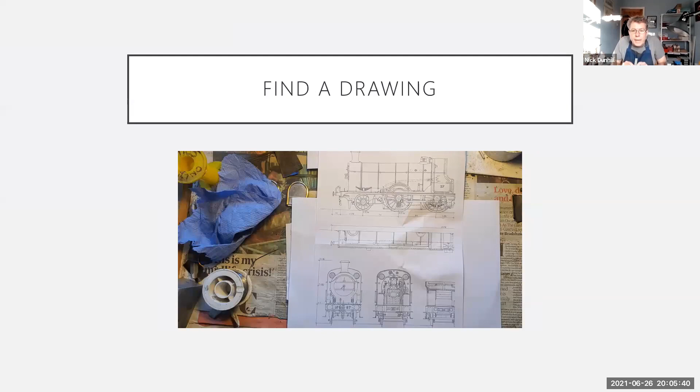Right, well, the first slide there shows the drawing that Simon sent to me by email. One of the first things I always check when I get a drawing through email is the scale on it. Simon sent this claiming that it was a 1:1 7mm scale drawing.

I found a measurement on it and checked it to make sure it was the actual height of something, which was 4 feet, conveniently 28mm. But on the drawing it was only 26mm. So the process of creating a PDF, emailing it, and printing it out reduced the scale of the drawing somewhat. I think that was worth knowing.

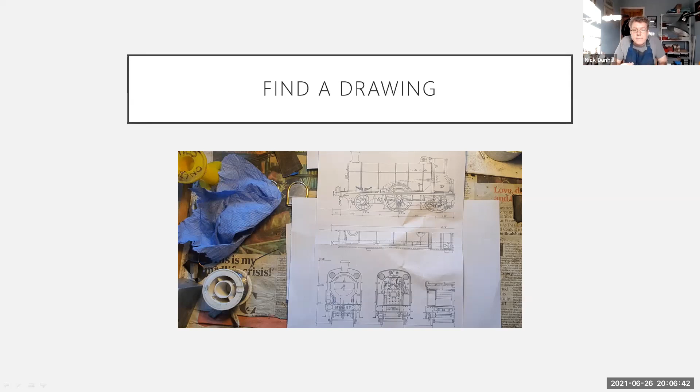If you go to the next slide, you can see what I've done there - some measurements worked out that I need to multiply by a conversion factor of 1.05. So everything I measure off the drawing, you multiply by 1.05, and that gives you the true size in 7mm scale.

You can see on the smokebox front there that I've made some very basic measurements. I always start by making a vertical line perpendicular to the footplate going up through the center of the smokebox, and then take datum points all the way down that line, which allows you to draw it out.

The most important thing is to start with the dead center, usually where the smokebox dart goes in, and in this case there's a nice smokebox dart smack in the middle, so that's where we started. I've taken some horizontal measurements across the drawing at various places above the center line, just to help get the radius right at the bottom - it curves in and then curves back out in quite a pleasing way.

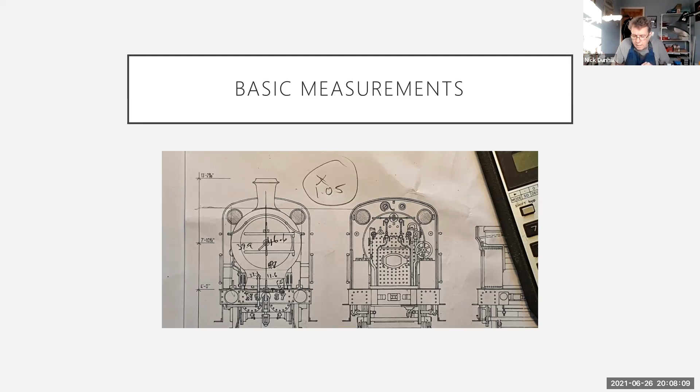If you want to zoom onto the next one - I transposed that into a very basic sketch. But you have to bear in mind when taking these measurements that you have to subtract twice the thickness of the material you're using in some places.

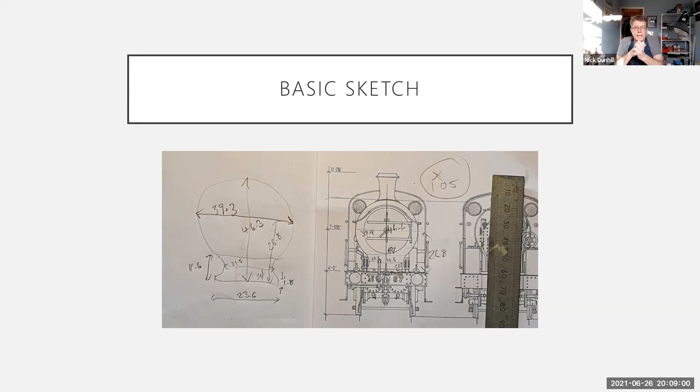Right at the bottom of the firebox and smokebox, it's always a good idea to make sure it will fit between the frames on the engine. There's always some compromises in fine scale modelling - the back-to-backs of the wheels mean you can never get the locomotive chassis to true scale. It always ends up 2 or 3 millimeters narrower than it should be.

What I always like to do is transfer that narrowing to the bit of the footplate that sticks up above the chassis, so it's coincident all the way up, and you don't get a step at the footplate level.

That sometimes means I narrow the bottom of the smokebox so it nestles between the frames. But in this case I got in touch with Simon, and he decided he wanted it to scale above the footplate and would sort out the chassis himself. That made it easier for me, because I just took the true measurements off the drawing.

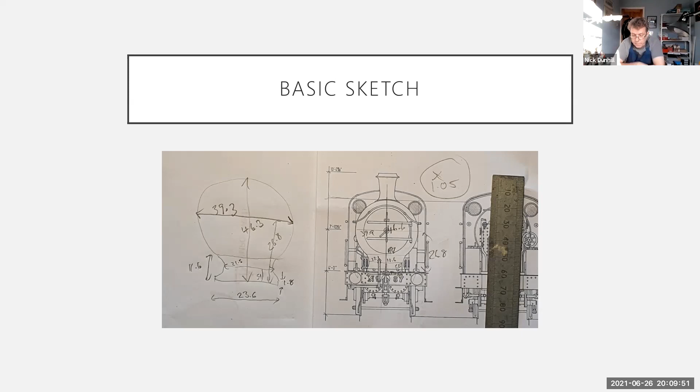Nigel Payne's mentioned that if the drawing you've got is under scale, you can use your photocopier and enlarge it - use the enlarge or reduce function. I'm not entirely sure I trust the photocopier part of my printer either, so I think it's probably worth taking a measurement. But he's right, I have done that in the past, just reducing it a little bit. So he's absolutely right.

If you want to move on to the next one - and there it is, I'm checking it. What I'm using is a series of machined blocks, things Nigel Smith, or it might have been Fred Lewis, gave me at a show - he said do you want these, and I said yeah, they'd be really useful. They're just rectangles of aluminium machined dead square, so you can wrap things around them knowing they're at a right angle.

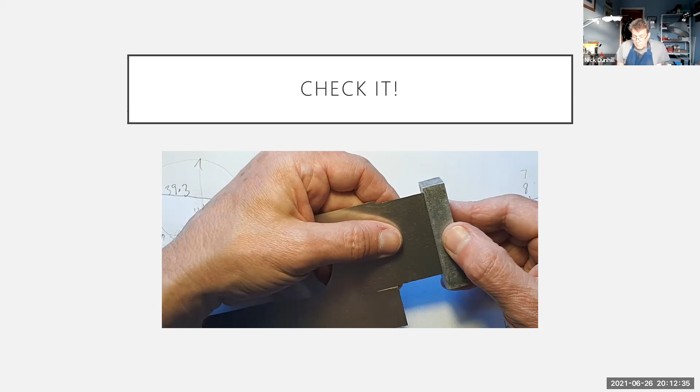Also, the little waisted-in bits at the bottom that you can see, I actually drew those with a circle stencil that I've had since I was at school - I must have been a teenager. I think it comes in those sets with a square and a protractor, and it's got lots of holes going up in millimetre diameter, and I was dead lucky - one of them was pretty close to the waisted-in bits at the bottom of the smoke box that you can see there. If you zip to the next one, please, James.

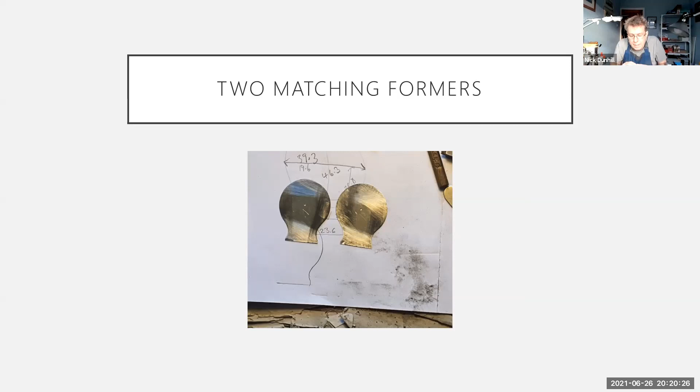Nick, just as a point, do you never solder two pieces of metal together before making your first cut? No, I don't. I always do one, and then solder that to the sheet and do the second one. I suppose that way you're not knackering double the amount of material if it all goes horribly wrong.

You can also see in that slide that I've cut out a base, and the two little thin strips above it, as you'll see a bit later, are just to form stretchers between the top part - sort of transom beams - between the top part of the formers, just to make sure they're parallel to each other before we start forming the wrapper. Do you want to jump to the next one? Thank you.

Now, this is the method I use for finding the length of the wrapper that I need. I think what I've done there is stretched a piece of paper or possibly some masking tape around the perimeter of the former, and then probably marked the length that I need to cut out so that I can form it all the way around the perimeter of the former. Obviously you add a little bit on as well - it's nice to have a bit of wiggle room, isn't it, something to cut off.

So that's got a pilot hole there for the chimney. We'll just take that scribed line off, and the same there. We'll leave a little bit on at the top because I thought the loco might have had a handrail knob just there at the top, but it hasn't. But I think it's quite nice to have a very lightly scribed line there, so you can line up the chimney when you put that on. And that is that. Well, that's very good, is that?

So if anybody's got any questions they'd like to ask, fire away.

There's just a suggestion from Jan that uses a waterproof felt pen tip to paint the area around where you wanted to scribe a line, then you can do a lighter scribed line you can see easier. That's not a bad idea, is it? Yeah, thank you for that. I do have a selection of felt tip pens here that at some point belonged to my wife, and my son, but they're all here. I never thought about that actually, just colouring it in a bit and scribing through. That's a good idea, I shall use that in future. Thank you very much, that's a good suggestion.

I mentioned about this Proxxon sanding disc with arbor from Hobbies, that's hobbies.co.uk as opposed to Hobby Holidays. Yeah, oh right, okay, and it's Hobbies spelled Hobbies. They fail just here eventually - the shank and the rubber arbor, they sort of part company. So what you'll find is when you try to sand something, this stops and this carries on turning. I think I've got one here that's self-destructed a few days ago. Look. Oh yes.

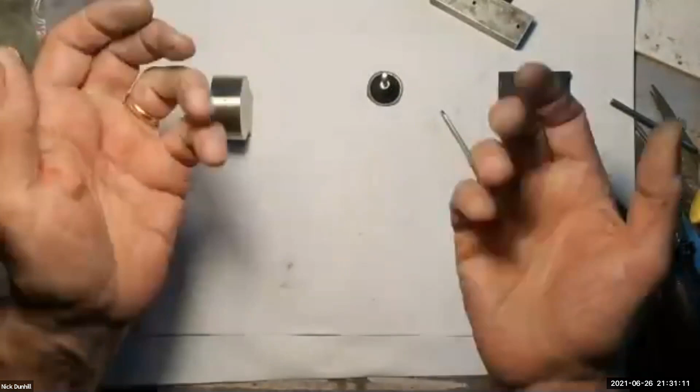But if you roll a boiler into a cylinder and then make some cuts and try to relieve the curved bottom of the boiler outwards to form the sides of the firebox, it's really difficult to get it nice and smooth without it getting any jinks where it's been folded the wrong way and you're trying to straighten it up. It's really not as easy as you think.

A lot of kits make that mistake, where there's been an etch on one of the frets that they've cut off in, I say factory, but it's probably somebody's shed somewhere. They bung all that through some slip rollers and roll it approximately into a cylinder. Then you've got to somehow manipulate the bottoms of the boiler out to form the sides of the firebox, and that's really difficult, because often they're rolled out of 0.45 or 18 thou or 15 thou, and it's quite difficult to get it to straighten up and be smooth without any jinks in it. That's quite hard.

So yeah, I always try to work my way forward from the cab. But you need to do your measurements in advance if you want to scratch build one, and it's quite a lot of head scratching to make sure. If you look down there in the scrap bin, you'll see loads of boilers that have been tossed in there because they didn't quite come out as I hoped, or they were the wrong diameter.

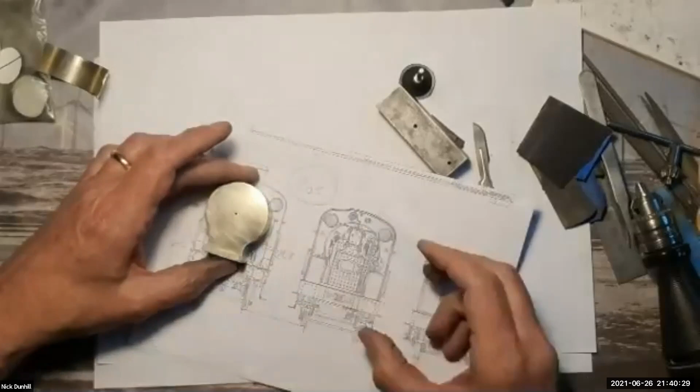We've still got a lot of people in the room watching - everybody's fascinated by what you're doing. We're not really doing anything now. We're just kind of, hey, look, that's not too bad, is it? Look, it just sits quite nicely on the drawing there - I'll take that.

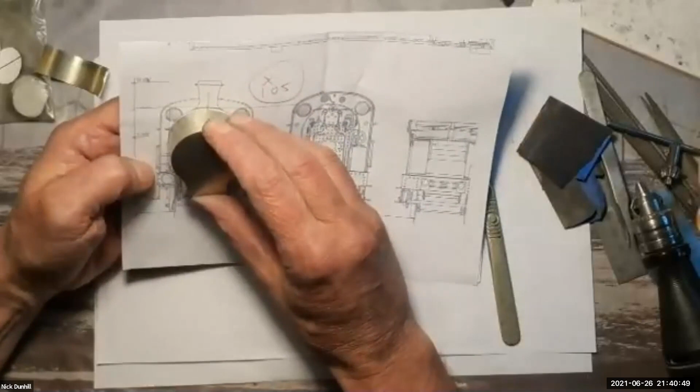It's not too bad at all. Actually, that's rubbish, isn't it, because this is slightly bigger than that. Because it is, look, and so it should be. Yeah, 1.05, 5.05, yeah.

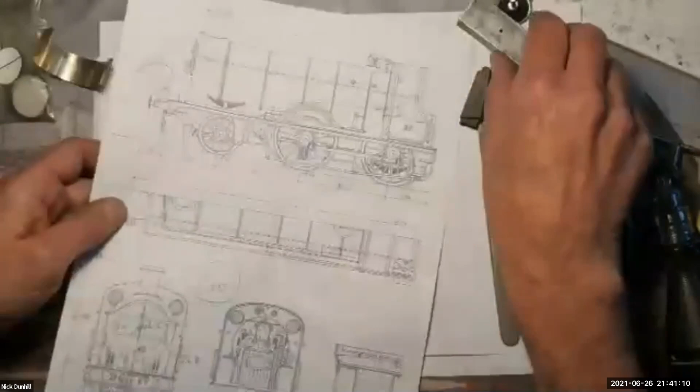I suppose the problem with photocopying and reprinting these is that printers distort things at the edges, is that right? Well, different printers have different qualities, some better than others. Mine's a really cheap one, so it's going to be rubbish. Somebody suggests HP printers may be reasonable quality - mine is an HP one. But you can tell, look, that dimension on the drawing is marked at 4 feet, which is 28, and you can see it scales out at just over 26.

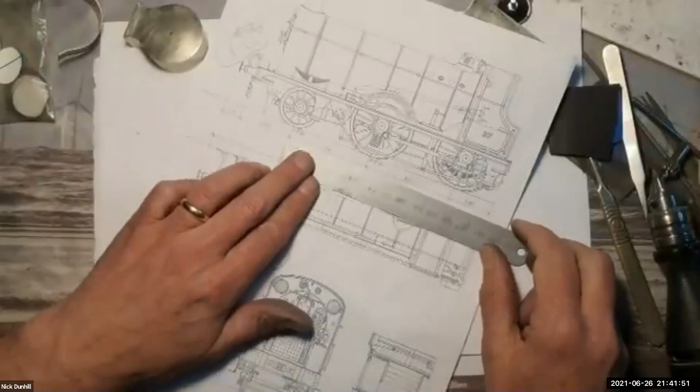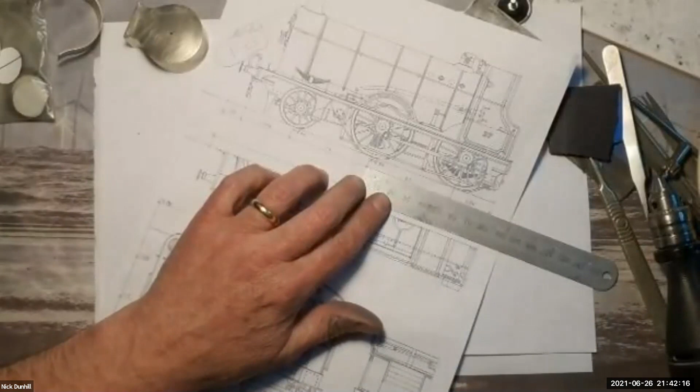So hence the 1.05. I suppose what you really need to do is pick the biggest dimension you can find. 8'3", that's 8 and a quarter feet, so that's 8.25 times 7, which is 57.75 - and that's miles out, you see, that's only about 54.6. So it's about the same amount of distortion. But we can work it out, can't we?

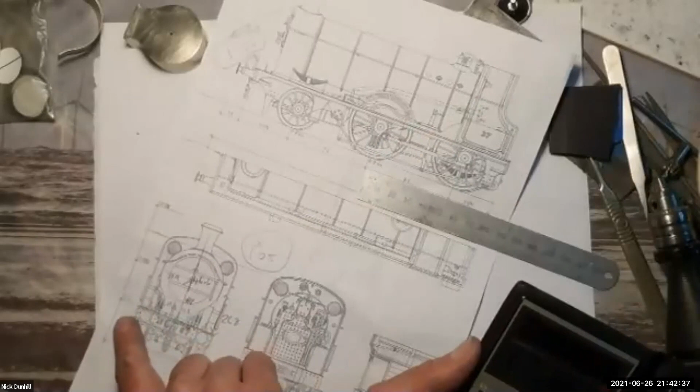Nigel Payne mentions you have to check both the verticals and the horizontals. Yeah, that's what I was doing, because if you look, that's a vertical one, and this one's quite close to the edge. I really don't know. As long as it all fits together at the end of the day. Well, I think so, yeah.

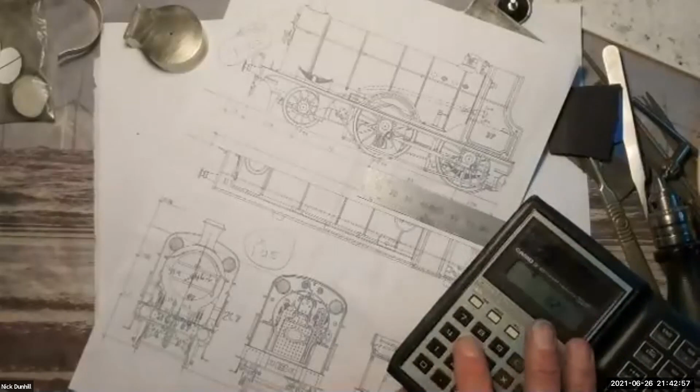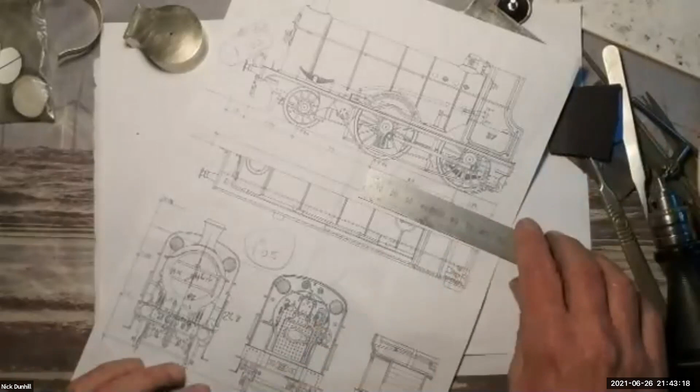Should be 61.25, and it's actually - is that right? 8.25 times 7 is 57.75, so if you divide that by what it actually is, which is roughly 54.4, someone's asking about rivet details - it scales at 1.06. I did it at 1.05, so it's not a million miles out, is it?

Somebody's asking about what, sorry? Rivet details - should he use a tool with a punch and die? Yeah, I've got a couple actually. I've got this one that I use most often.

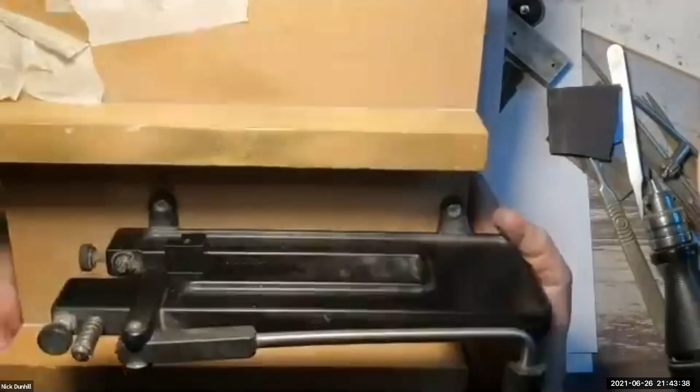I think, yes - isn't this a metalsmith's one? It is, I recognize it. I've just bought one, yeah, and it's kind of screwed to a bit of MDF. Might be better if I show you on the face cam, although it's getting a bit dark now, and you might not be able to see anything if I turn this light on.

No, it's not too bad, is it? Yeah, that's a metalsmith's thing, and I mounted it on some MDF, and I just put some pieces of wood there to support the sheet across the anvil, and these have been cut by a router so that they're the same height that the anvil is above there.

And then I've got another one, and this is good because you get a kind of handle, don't you, for forming the rivets. And you've also got a guide as well. Yeah, that's got a guide on it, and that's quite good. And then I've got this one that I bought originally, which I think it came from somebody called Silbert Clocks. Is that right? Does anybody recognise that? And you just hit it there with something, and that forms a rivet.

And I kind of didn't really like that, because it doesn't really... I mean, it's got a kind of a crude guide here that you can move in and out for getting your rivets in line. And then it's got... I don't know whether you can see that.

I'll probably have to go back to the top cam, won't I? Oh no, it disappeared. Oh no, we've lost you, Nick. Yeah, what's gone wrong? I don't know. No, me neither.

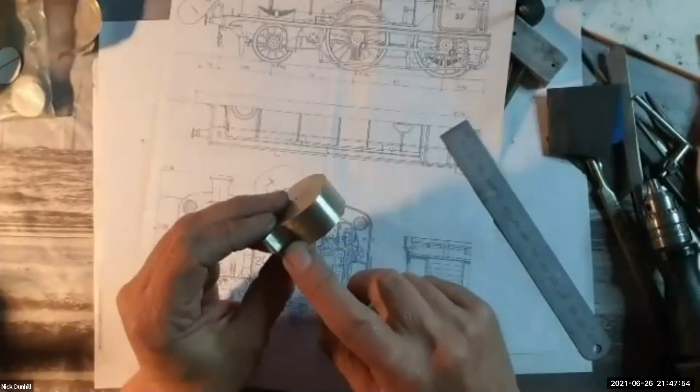I wonder what happened there with the tech. It all seems to be working okay now. I mean, obviously you would just form your rivets around there, and it wouldn't have made that much difference to this process, really, would it? Because we put the wrapper on flush with this face, so you would know that dimension to your row of rivets.

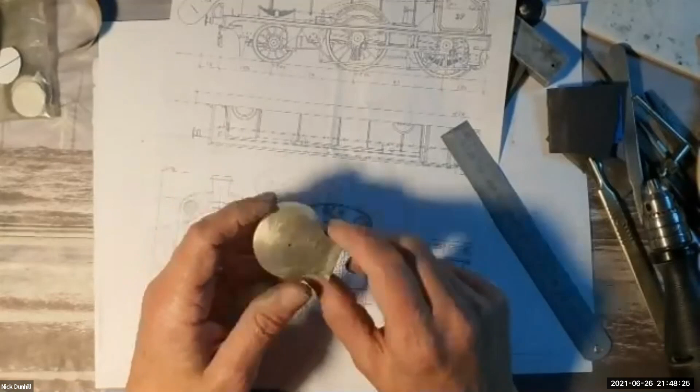Then you would know that dimension to your second row of rivets. And then when you took the waste off around the edge, with a bit of luck, the rivets would all be in the right place. So yeah, I just use a Metalsmiths one is the answer to your question, which is just here.

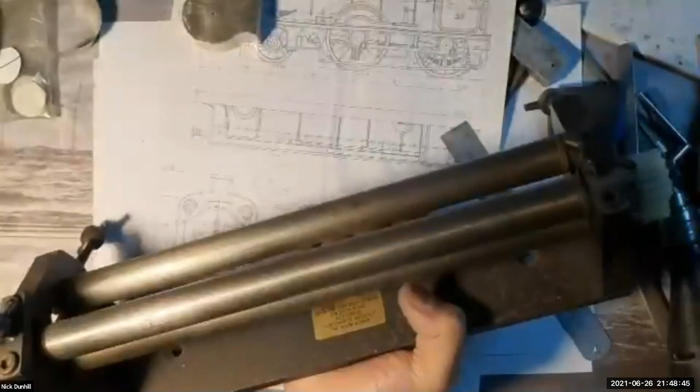And this isn't kind of an advert for Dave Smith, but I've also got one of his rolling bar things here as well, which I was lucky enough to find on eBay, which is quite good, isn't it? It had a big ding in it there I had to grind out, but otherwise that works quite well.

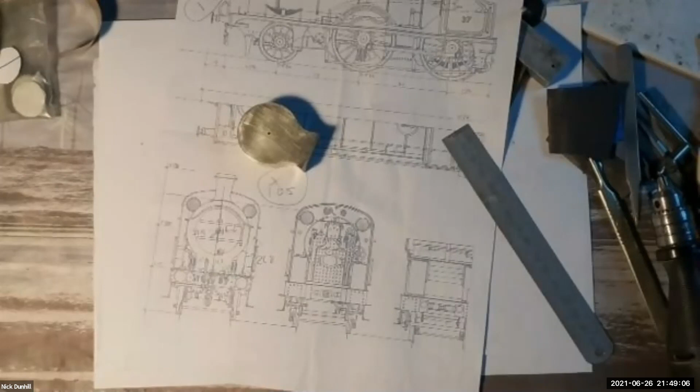When you're doing bolts, is there any better way to represent bolts than soldering in? Well, I always buy proprietary fake nuts and bolts. I don't know whether we're going to be able to see them on the...

Can you see those on the... it won't really focus. Goodness me, and they're really tiny, these are sort of 0.5 of a millimetre. I've got some that are 0.6. And you just have to really drill tiny holes and let them in one by one. But they're a bit bigger - can you see those? They're kind of like fake nuts and bolts.

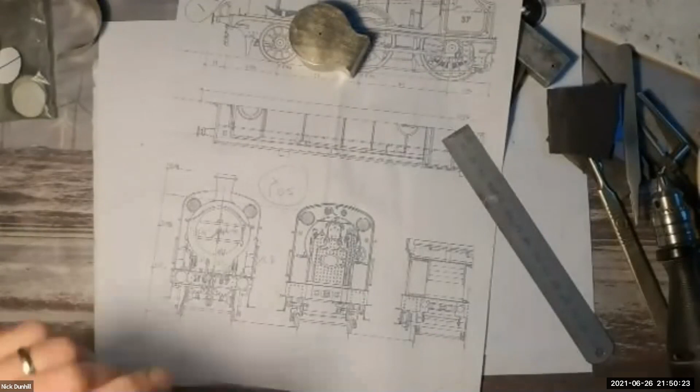I don't think I can get the camera to focus on them. It's just a bit too close. But that's how I do nuts and bolts - I just buy them, drill holes, and fit them in one by one. That sounds like a terribly tedious job, and it is. And the nuts and bolts are actually quite expensive as well.

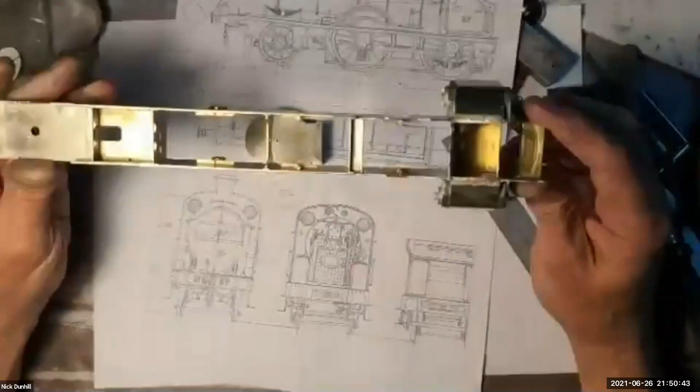There's two further questions coming in. What horn blocks are you using on the Z class? Moving on to the Z class - here's one I made earlier. That's the chassis for the Z class, and as you can see, I used 1.5 by 1.5 millimeter L-section as the horn cheeks.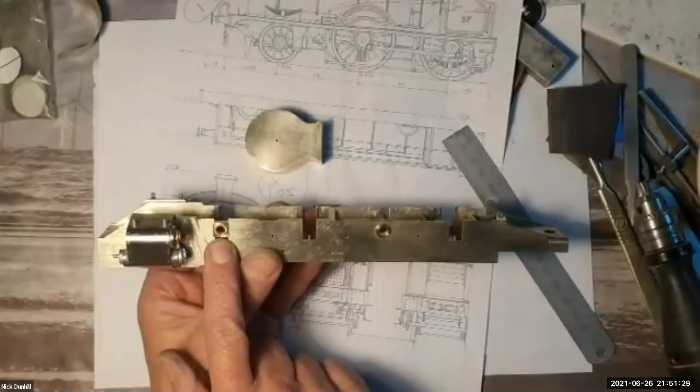And I just used Slater's axle boxes, and they fit quite nicely in there, like so. Except that doesn't fit quite nicely because it's not the right one - that's number 1 right, this one. So that should fit quite nicely in there. That's a Slater's axle box. I mean, it really shouldn't work quite like that - they should be all inboard supported like so. But this is a cheaper and quicker way of doing it.

And then a friend of mine - can you buy the horn blocks separately? You can, well, you can get generic horn blocks off people like Slater's and Laurie Griffin and various other people. But I always make the horn cheeks out of 1.5 by 1.5 millimeter angle.

And then my friend with the 3D printer, who squared up the drawing of the Z class that I got from the Railway Museum the other day, is going to print me the bolt plates. So we'll have a 3D printed structure that just slots over the horn cheeks to represent the bolt plates. They'll just be 3D printed because they're not structural, just cosmetic - I'll slot them in place and glue them on. But the structural bits are all soldered brass.

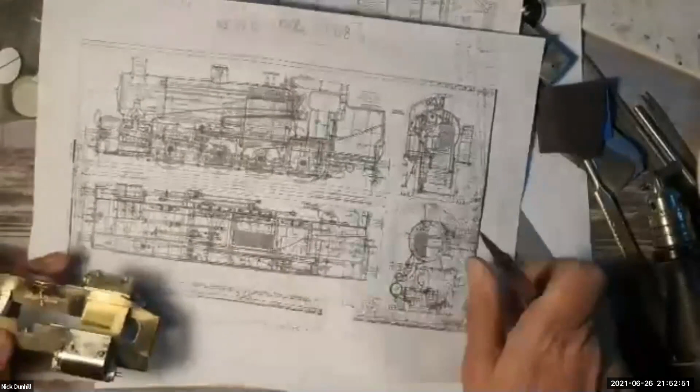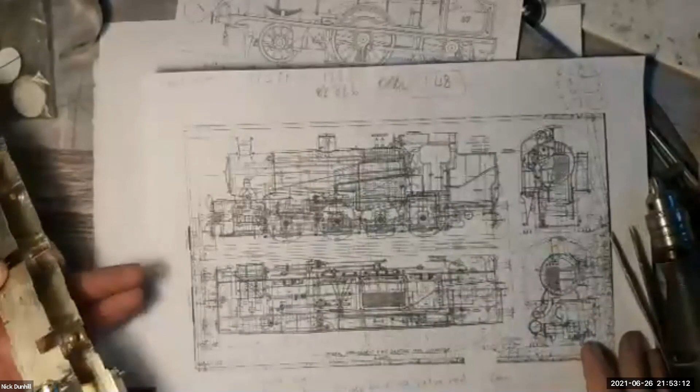And the Z class has got a really fancy - I don't know whether you can see - they're just there, look, let's see if we can. They've got a really weird keeper plate at the bottom of the horn guide, which he's going to 3D print for me as well. That's really upsetting the camera, isn't it, that GA? There's lots and lots of layers, drawn on top of each other.

But yes, I use Slater's - the short answer to the question is Slater's axle boxes. He sells them separately. If you ring them up, there's a catalogue number that starts with an X, but if you just tell them brass axle boxes, square axle boxes, I can't remember, they're about 50p each or something. I just buy a bag of them every so often when I've run out. But I always use theirs.

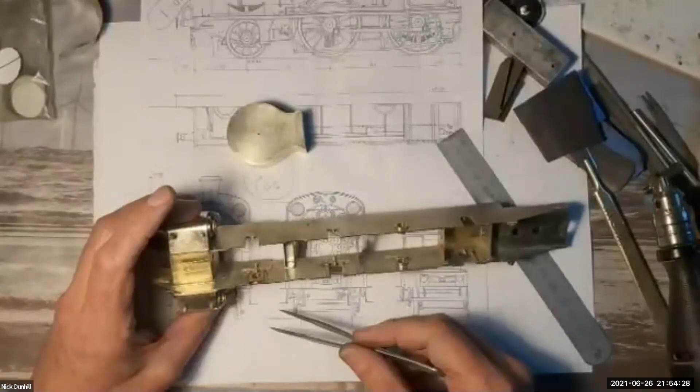The Finney 7 ones are quite good, but they're a lot wider. If you've got a garden layout, your priority might be having a big bearing surface area, and you might be better off going for the Finney 7 ones - of course, other brands are available. But they start to protrude too far on this side of the chassis, and then you can't get any inside motion between the axle boxes without doing surgery on the horn cheeks. I kind of try to avoid that.

I don't know what people think - do you think there's enough bearing surface area in there? I don't know, sure it'll work. The wheels don't turn very quickly, do they? So they're not going to wear out very quickly, I would have thought.

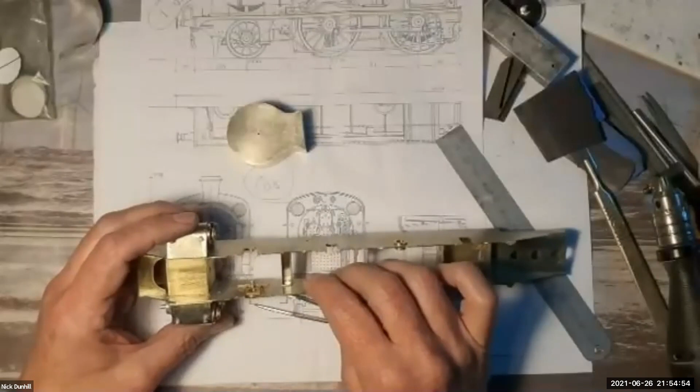I had this discussion at length with my dad - my dad's a proper engineer, not like me - and him and Nick Baines as well at Telford one year. We were discussing the merits or otherwise of roller bearings in toy train axle boxes. There was a fashion, wasn't there, a few years ago for using roller bearings.

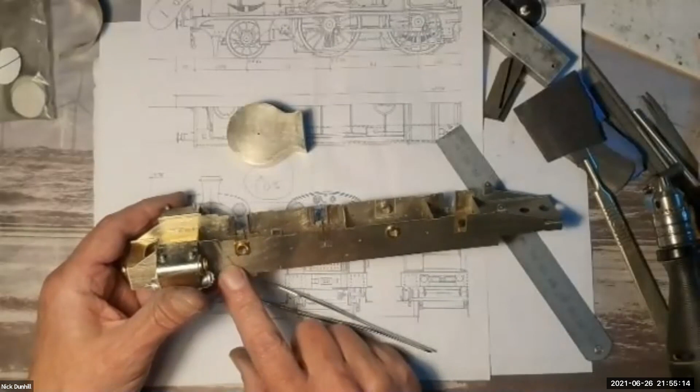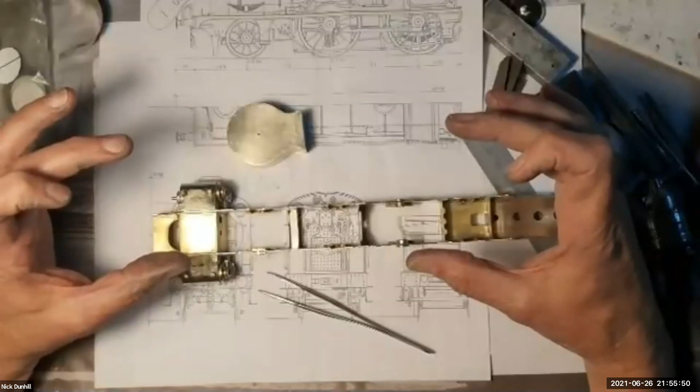Your roller bearings in here - both Nick and my dad said that, being proper engineers, you couldn't use roller bearings in that application because they weren't supported properly. The inner and outer races have to be held concentric with each other. You can imagine them in a push bike hub - the outer races are supported in a tube that goes across the centre of the wheel, and the inner races are held on the axle, also concentric with each other and with the outer races. That's really the application rolling element bearings should be used in.

If you use them like this, it's actually using the bearing as a lever as the axle goes up and down. If you look at a real railway application, when they do put roller bearings in axle boxes, the bearings are connected by what's called a cannon axle box, where the bearing housings are joined together with a big tube that the axle goes down the middle of. A lot of British Railways standard engines were built like that, with roller bearings, so they were more resistant to wear and didn't need so much frequency of maintenance. But they were all held in cannon axle boxes.

Somebody will pick me up on this - I think the LNER did it, didn't they? Once Gresley wasn't the CME anymore. Wasn't it one of Thompson's things as well, using cannon axle boxes? I think you'll find, Nick, that's because they used taper roller bearings, and they cannot take any misalignment of the axle from the outer. Well, you have to preload. You have to preload tapered ones as well. I have no idea how they preload them.

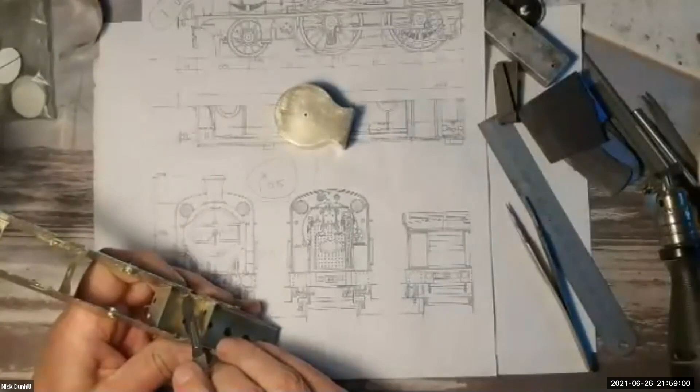So thanks very much to Nick. Nick, do you want to say something? Well, just to say that scratch building seems quite daunting, but as you've seen tonight, if you have a methodical approach to it, and you are quite careful and accurate in the way that you cut things out and assemble them, it's actually quite straightforward and quite satisfying.